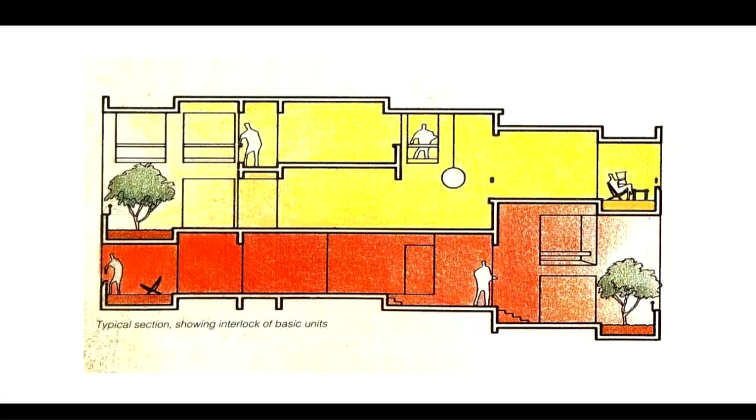I went down to Goa - this is my architectural tour in 2015 - and I found a few buildings down there of Mr. Correa's. What struck me about those buildings was there was a patience with the past and a striving towards the future. They were incredible buildings, and their heaviness was a surprise to me. I didn't expect such heaviness, but if you relate it back to the temples and the stepwells, you can understand it. There's a wonderful translation between the new and the old for me.

But I must say, what most took me on this simple trip was the stairs. This one set of stairs I remember to this day, and in fact I had to go through 500 to 600 images to find it. I looked at this set of stairs and thought to myself, the person who designed these was an architect. They weren't on a drawing as a set of stairs, they weren't a builder translating a set of stairs. They were deliberate and, for my money, really beautiful. They made me think a lot about access, but also where does beauty start and where does it finish?

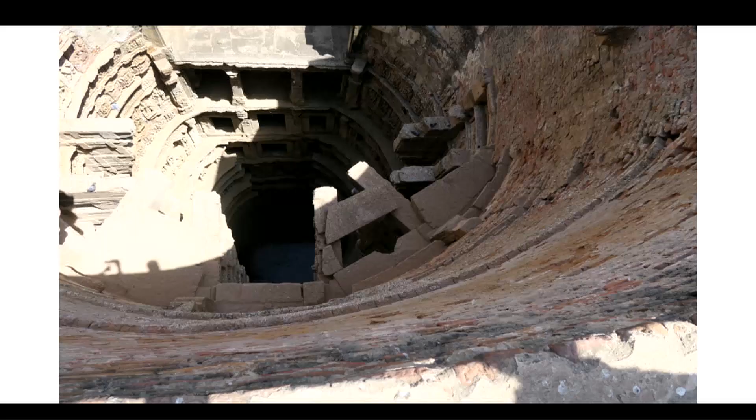I was asked the question earlier by a journalist, wondering how you, as an Indian group of architects, employ and integrate your past into the future, because your past is so rich, so intelligent, so symbolic, and so important.

So when I looked up Charles, when I was first approached to do this lecture, I found consistently over time these 4 values: integrated modern with tradition.

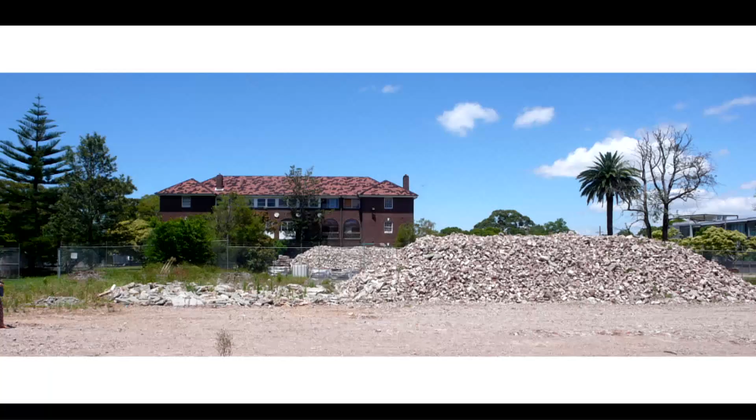Seven years ago we were asked to do, or rather it was a competition, a building here where the blue mark is—an old building in our terms, only 100 years old, so not really old, but in Australian terms it was. It was heritage listed, which confused me. I said, heritage listed, it's hardly a heritage building. But they said, we want to retain the arches.

The project was to change a nurse's quarter for an old hospital into a creative arts centre—almost the opposite in terms of usage. And the arches were protected by heritage order.

So what we did was put 7 arches through the old arches without touching them by 30 millimetres, then took out all the space underneath to create a two-storey space. Essentially we were trying to reinterpret some of the very rare Australian qualities of architecture—in this case, the veranda or the covered room.

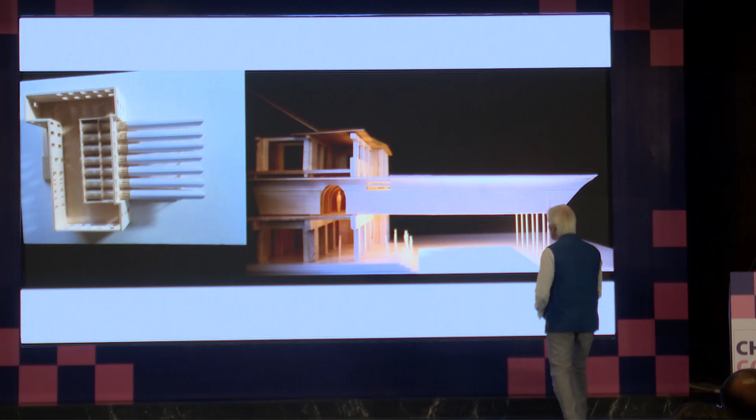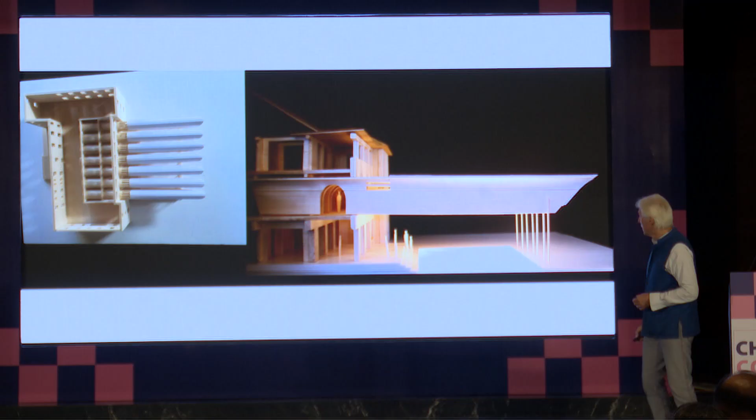My sales pitch to the jury was that this would become a highly activated external room for the community, and that worked. So these are the sort of drawings that we do—I still draw in pencil—and this was the outcome.

All we did was cut walls and put some brass edges on them; we didn't finish them at all. Then we drove these 7 arches through, and they became workspaces for creative people, like jewellery spaces and sculpture spaces. We then cut an equally beautiful form in the other direction to get a cross connection as well.

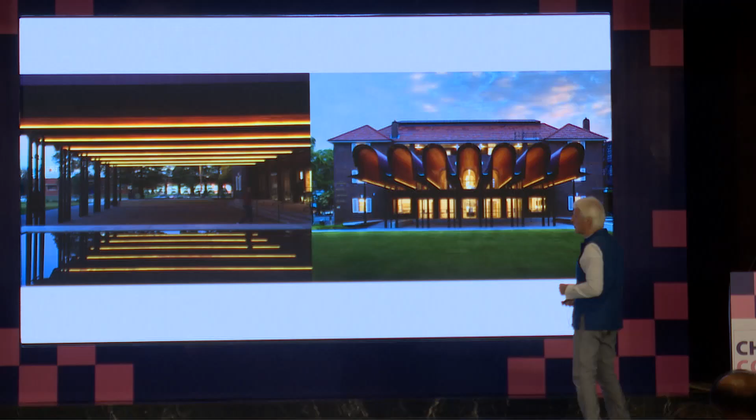So on the first 2 floors of a 3-storey building, we created like a room inside a shell. This later became quite a well-known building—I should have had a photo here of a fellow doing Tai Chi, because in our presentation we showed a fellow doing Tai Chi in the veranda, and the first day I went there, someone was actually doing Tai Chi.

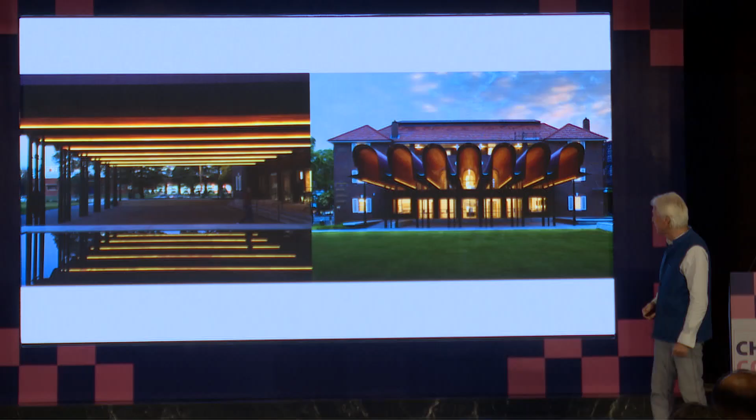This pond catches the water off the roof, and inside it, very shallow, is the carving of the original landscape of that place, so that as the water evaporates, the landscape reveals itself.

Sustainability and climate responsiveness: we did a building in 2007-2006, which was a wool shed. The wool shed is a traditional Australian building, actually, for shearing sheep, and it had never changed its design in 150 years.

What we did was redesign the wool shed so that it was basically a climatic response to how you might manage weather patterns and temperatures in an environment that is really demanding physically—probably one of the most demanding.

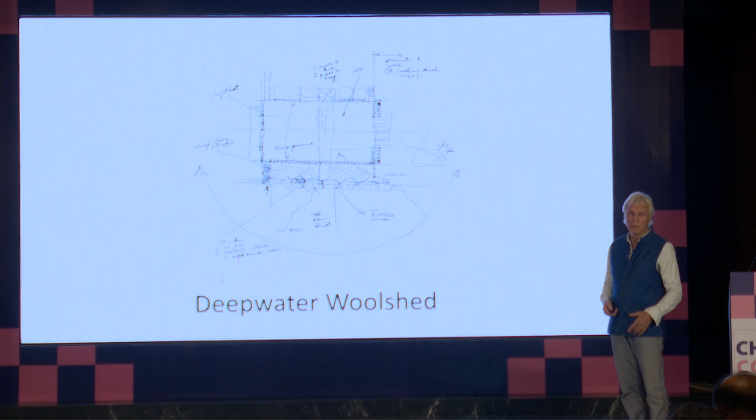These men, and women now, shear for 8 hours, hunched over like this, shearing about 800 sheep a day, so 200 sheep a session. A very well-known entrepreneur approached me and said he'd like to design a new shearing shed, a new philosophy in terms of shearing sheds.

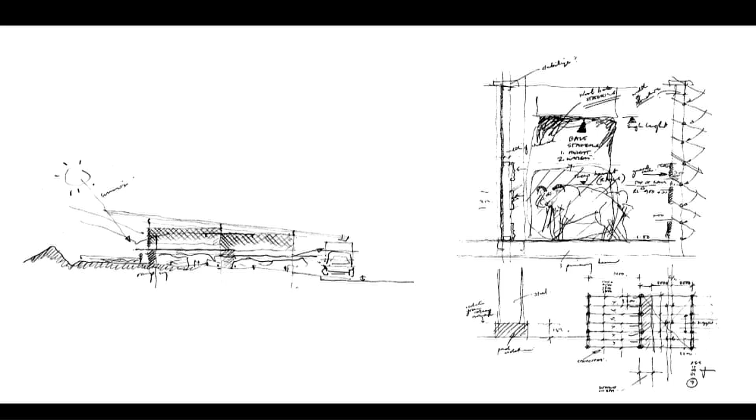So the building was designed very much based on sheep—heights of wool bales, accurate sizing for managing sheep. I'm from a sheep station originally, so it was quite appropriate to do this, and in fact my father was an engineer, so there were two things combined there.

We introduced this roof system, a whole new design that hadn't been done before, invented by a farmer. It's a deep corrugation that spans 20 metres and cantilevers 5. We had 9 sprinklers on the roof that we turned on at about 11 a.m. to cool the building down, then we took the cool air from the shaded ground, because when ground's in shade for more than 5 days, it cools down quite rapidly.

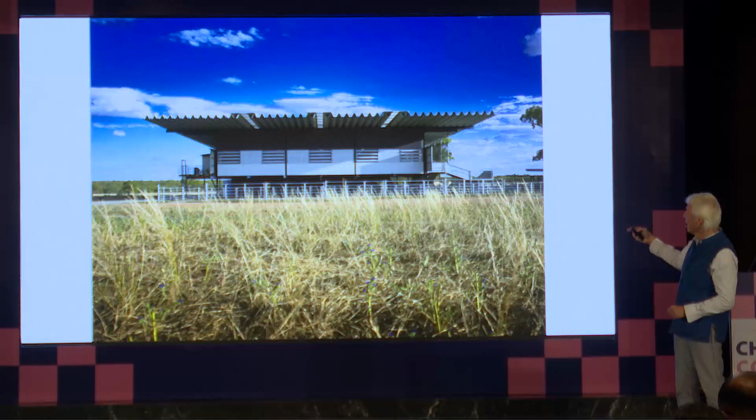We ran that cool air past the shearers. On this side of the building we had expanded mesh screens that we ran water down, since it was a non-humid environment, and the air came through those. With those 3 techniques, we reduced the temperature of the building by 12 degrees ambient.

All the walls were the height of the wool bales, and ventilation came in through these chicken coop panels. We had no complaints from our clients, which was good.

But what happened was we also put a lowered ceiling in just here, where the heat from the sheep came up, and we caught that heat. In winter, we blew it down on the shearers and heated the shearing platform by 5 to 8 degrees.

So that's on the other side where the shearers are, bringing it across. This extended section here is for the people sorting the wool. These are pivot vents here where we bring the cool air up across the shearers.

This shed has now become a benchmark for the design of shearing sheds in Australia. You can see the 2-way fans up here that pull the air up and also push it down in winter.

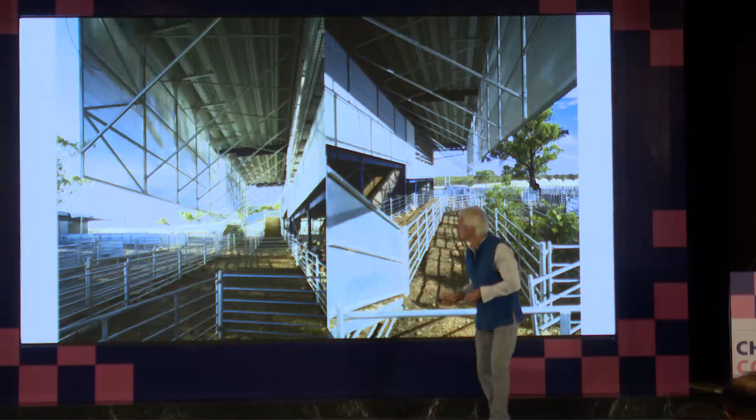This is where we run the water down these screens, and then the water runs onto this, which is salt bush that feeds the sheep. But as it runs onto the salt bush, it also catches the dust that comes off the yards. So there's a number of things being done here by this very simple building.

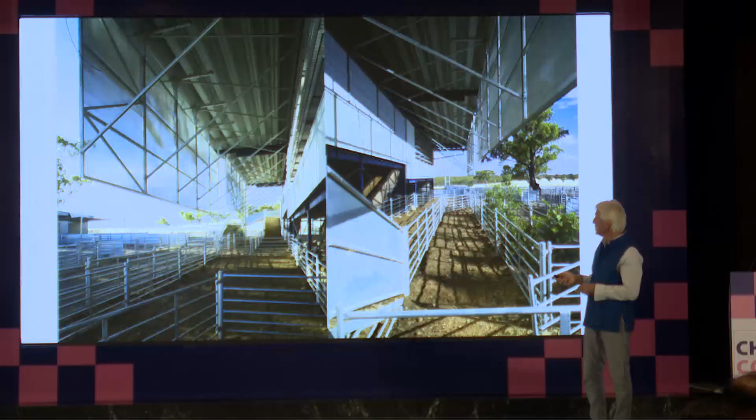By lifting it off the ground, we're able to hold 2,000 sheep under the shed in case it rained, because you can't shear the sheep in the rain. And we put the water tanks on the cold side of the building so they didn't heat up.

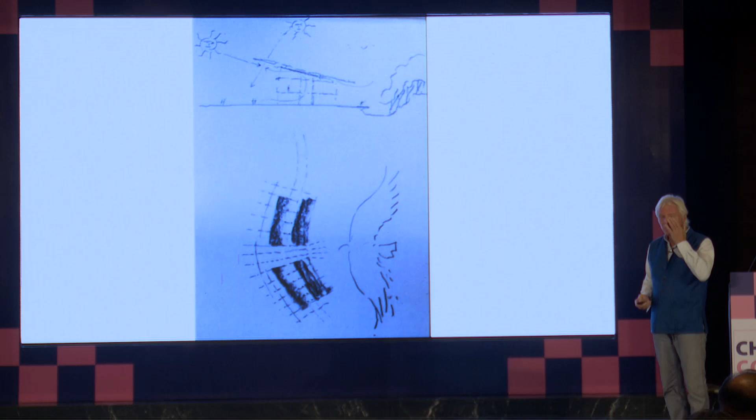The principle of the building was it was formed around a pond, and the pond had fish in it, and every teacher working in that building had a fishing line and could catch their lunch. It had a fly roof, which was a natural ventilating system, and it had a series of light shafts.

Now, the human-centric design here was there were 3 elders, Aboriginal elders, that managed the building process. We met with them every week and went through the design with them, and what became apparent was how important humans were to them—much more important than the building.

Every response to them was, well, we'd like to come in that way. We'd like to have multiple entries so there's no prioritised entry. We'd like the building to be a house, not an educational centre. We'd like people to have equality onto the pond. We'd like every person to have access to the outside and access to air, fresh air and sun. It was a really interesting process, and that was 22 years ago.

This is my teacher, Richard, and this is one of my students, Sue, and the 3 of us designed the building. So it's 3 generations of architect, which was really interesting.

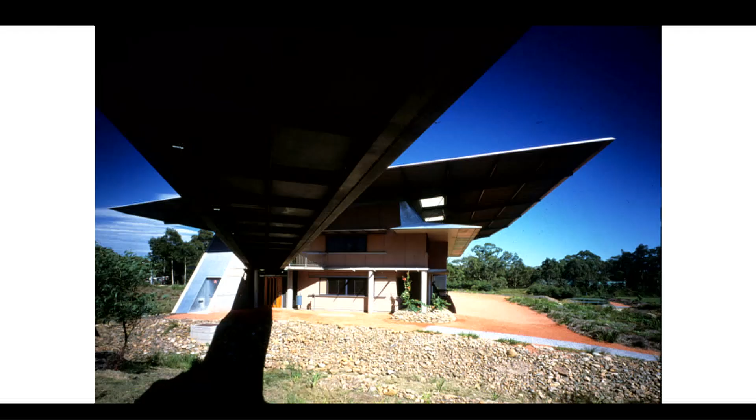This is one of the pathways they insisted be into the building. It's the pathway from an old swamp where there was Aboriginal settlement, and then there was access in both ends, both sides and the end as well. I think there were 6 entries to this building, none of them prioritised.

The central room had a huge door on it, 8 by 8, and inside that central room was a fire that you could put on. You actually had logs for the fire, so fire was very much part of the building design, and there was a kitchen, and a place for elders to meet.

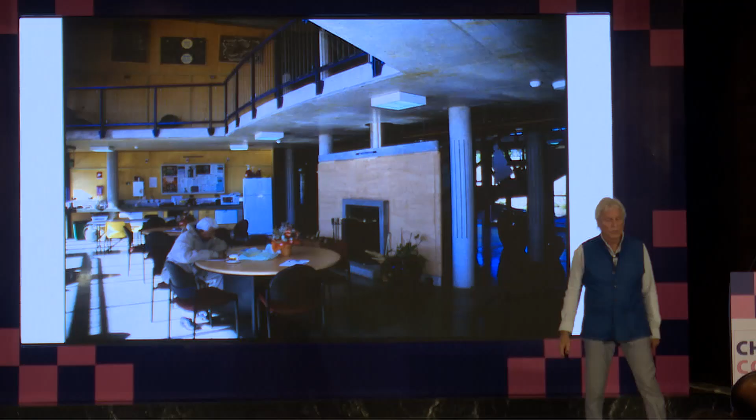So the inside of this room had a kitchen that went to the outside. It had a fireplace. It was a home. It was a house. And just as you have an opera house, you can also have an educational house.

The outside kitchen, light shelves to bounce the light from the skylight into the rooms, and classrooms that had access to the outside. So the awareness this brought upon us, even more than what we already acknowledged, was how important this connection is for education. It's not a distraction, it's actually a fundamental connection with nature that assists in one's balance.

Corridors—these were grates in the floor where we took the cool air from downstairs and evacuated it through vents up the top in summer, and then closed those vents in winter and heated the building. We incorporated artists into the building, which was a competition.

We had artefacts in the downstairs rammed earth wall. The earth was a local earth. And this is where the teachers would come at lunchtime and fish for yabbies and throw them on the fire, which is an interesting concept—that a building, an educational building, a university building, can be educational in terms of life as well. You can go out and catch your food. That was introduced by the people, not by us.

The central room, open. And then affordable housing—the four things. Five years ago we started a company called Dimensions X, which builds these modular homes.

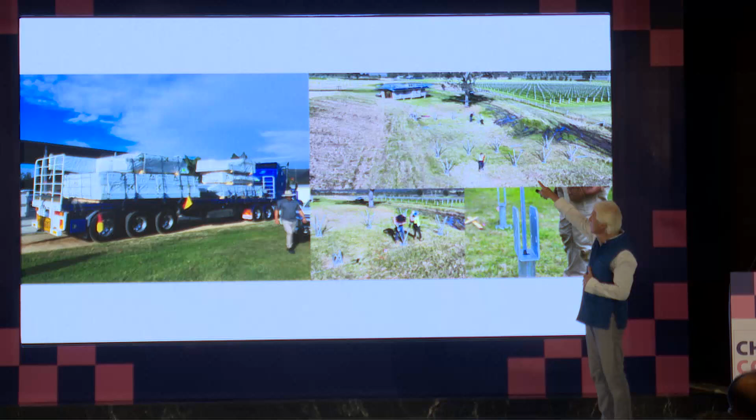We spent the first two years doing design research, and then we ended up doing CLT homes that arrive on the back of a truck.

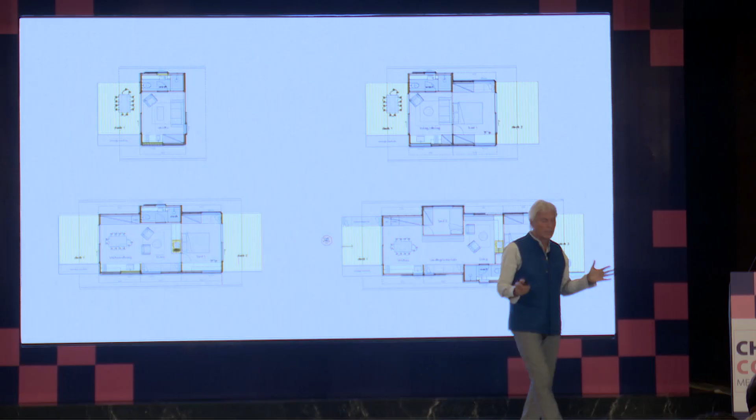This CLT model, the three-bay model, has 729 combinations. Someone can get onto a website and design their own house with 729 combinations, because the side walls have three different positions—so there's nine possibilities per bay.

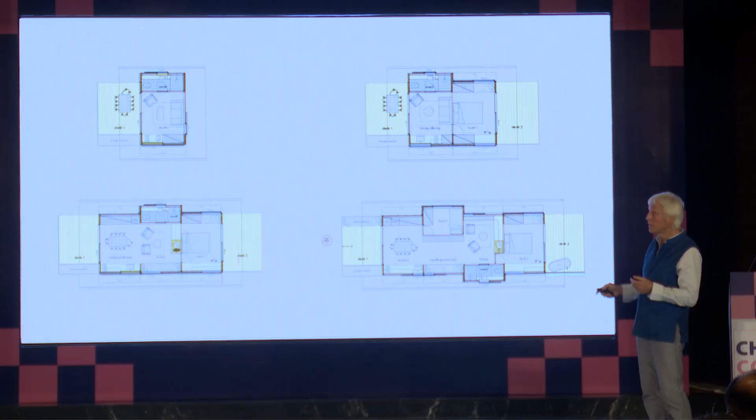They're erected in a day and a half, and then fitted out with joinery that's pre-made in a workshop we have an interest in. That joinery gets delivered and installed in the building in another three days. So the entire building, about 62 square metres, can be up and running in under two weeks.

At the same time, it was the end of COVID, and this was a student in the office, Emily Winter, and we decided we should do cheap housing for students that they could also use as a studio.

So we got a trailer that you can buy from any steelworks fabrication plant, and we put a back on the trailer. Emily did these drawings—well, it's a series of drawings. And we built this little thing we call the mobile studio, which is this building here.

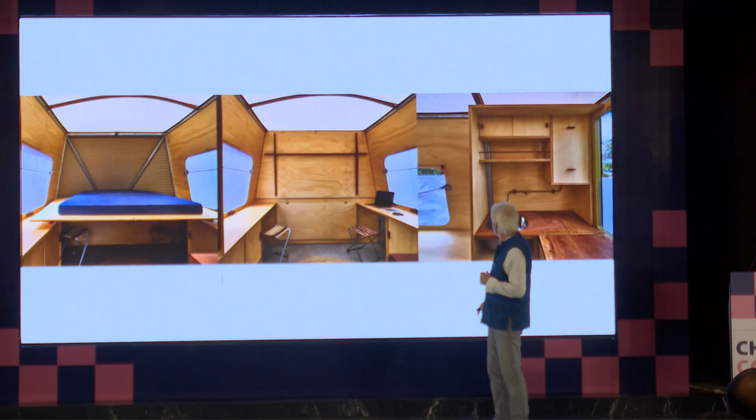It has a section here which folds down and becomes a bed, or you push the bed up and it becomes a desk for two people, and it has a little kitchen on this side of the trailer.

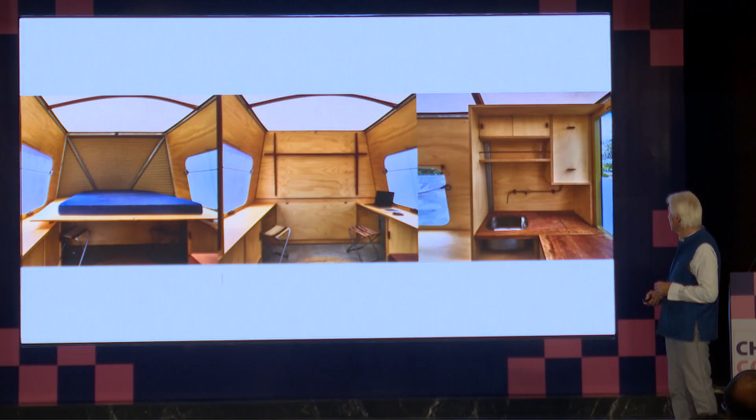It's a lot of money in India, but for $18,000 a student, or two students, can have a little studio they can park in their parents' backyard, on a beach, or in a caravan park. It's got a canvas roof, so the light comes in—it's a beautiful light. We've had, I think to date, 800 registrations for these.

That's the combination of the two buildings. What people can do, if they want to expand this house—and it really is working off the back of indigenous thinking, housing as mobile—is, if you want to expand the house, you can buy another one of these and have another bedroom study that you can put anywhere on your piece of land. You don't have to extend your house.

So, from what I can work out, the primary parameters of Mr. Correa were place, climate and tradition.

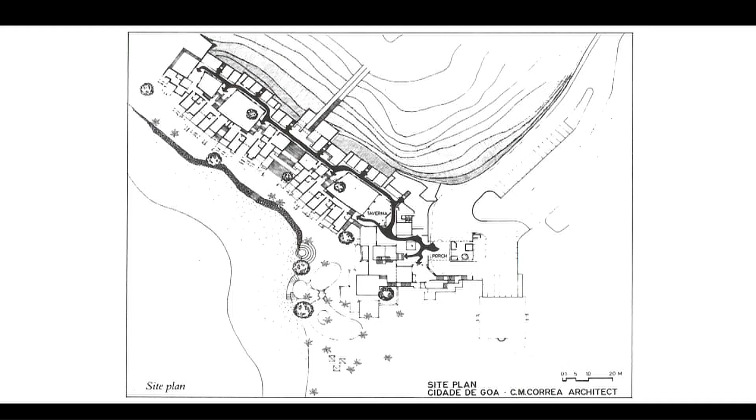This is a building I found down in Goa which intrigued me enormously, not just because it looked different, but because of how it was sited. It was sited incredibly cleverly up against this hillside, and even though it was a modern building, it had this quality of dense Indian occupation about it—certainly not like this, but with that nature.

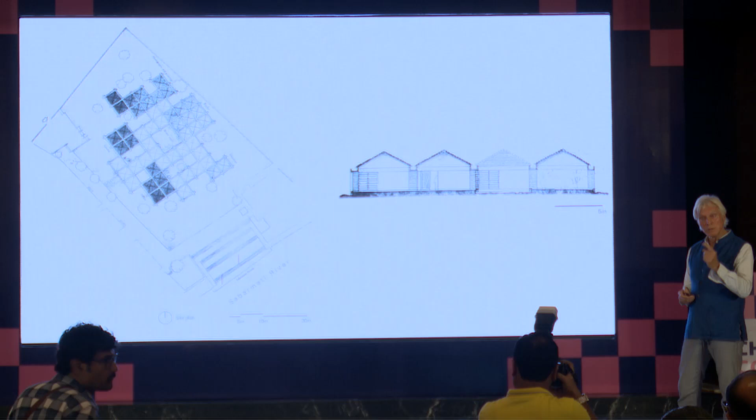And on such a dignified grid, something that changes over time and developed over time, if you look at the housing as the last example.

So what's our philosophy, and how does our philosophy overlap the Correa philosophy? I think our philosophy is definitely, how do we best preserve nature? I think that's a really important part of our future. And I was just at the Eco Park Dome this afternoon, where I read that 80% of cleared land has pesticides on it.

Interesting. In Australia, we always start our talks or our conferences with an acknowledgement to the people of the country that we're speaking on. So rather than do that, I'll make a note of that.

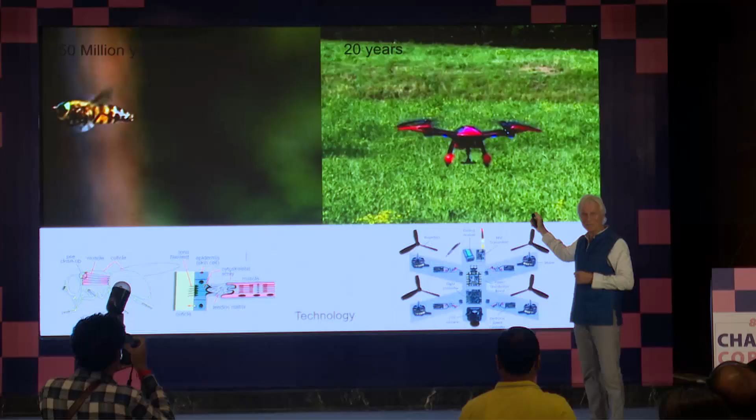Now, the guys over here told me this would work, but it's not. This one here also flies, but maybe it shouldn't. Oh, there we go.

So this honeybee has been around for 150 million years. And this drone has been around for 20 years. I mean, it's been done before. And in fact, it's been done a lot better. And we don't pay attention to that.

I wonder, because I muster these sheep all the time, and I see sheep, I wonder if we're not a little like sheep. We don't think enough about what we're doing and how we're doing it. We're a bit follow the leader-ish.

I'm just going to show you some projects through the country. We're doing 2 projects over here. Kunawarritji is probably one of the most remote communities in the world. It's 15 hours drive east of Port Hedland. And it's only 150 people. At ceremony time, it might swell to 500.

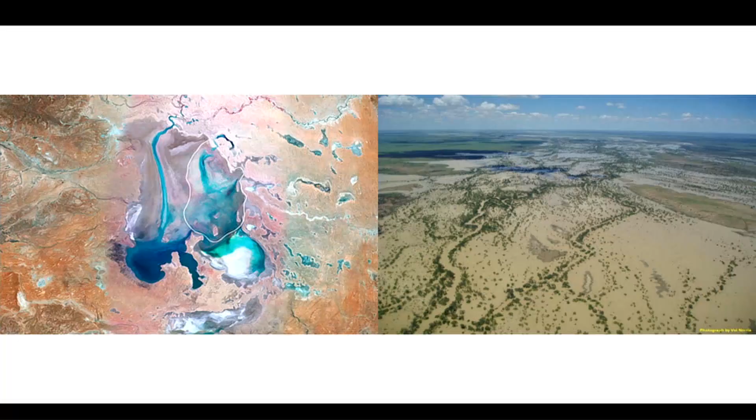Our country is about 24% desert, incredibly flat, oldest continent in the world. Most of the water of Australia, most of this water in the centre of Australia flows to that one lake, which is Lake Eyre, which is the most pristine salt lake in the world. And then it disappears. It doesn't really disappear. It goes to the Great Artesian Basin, which is the biggest artesian basin in the world, which has 64,000 cubic kilometres of water in it.

And that's why trees grow in the desert. And at the moment, in fact, 2 months ago, this is the Cooper Creek, which services the Lake Eyre, floods to about 60 kilometres wide when it's flooding, and the whole country changes.

We inherited, and I think to a degree India did as well, but they fought it off, sort of an English way of looking at our country. Winter, summer, autumn, spring. But in fact, there was a very strong Aboriginal notion of the seasons that we had no understanding of whatsoever, which were far more appropriate.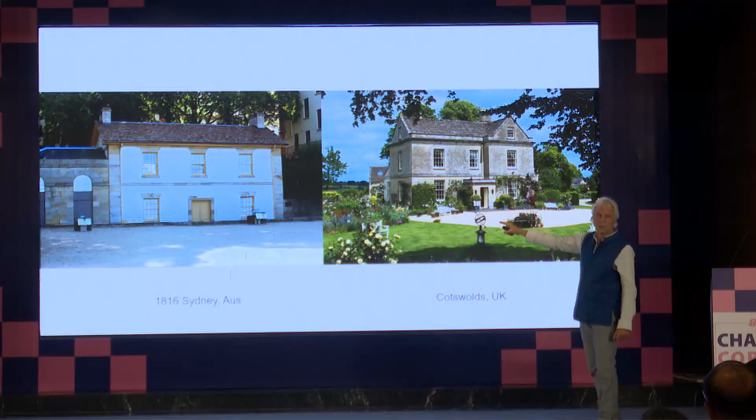This is in the Cotswolds in the UK, and this is the first building in Sydney. We inherited a building type in Australia that was completely inappropriate to the country, to the landscape and to the climate. These are our new building types.

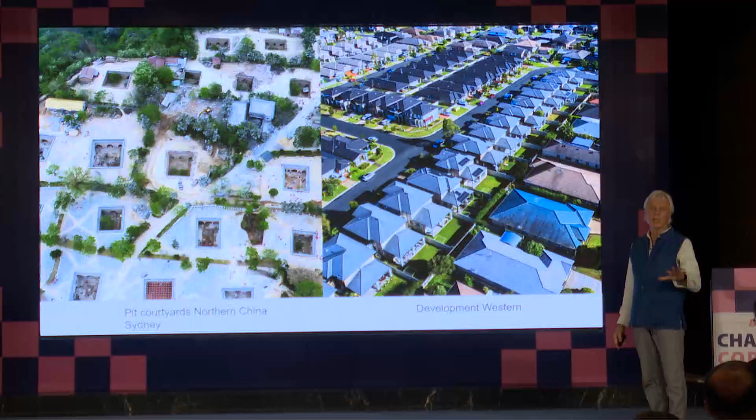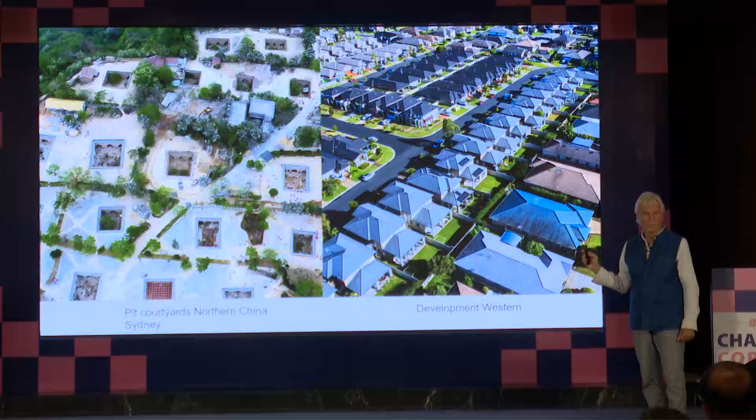These buildings, which are subterranean courtyard houses in northern China, are built for climate management and social interaction, and they're highly successful in terms of stable communities. I reckon in Australia, people would buy and sell houses at least 3 times in their lifetime, so there's no continuity to the community.

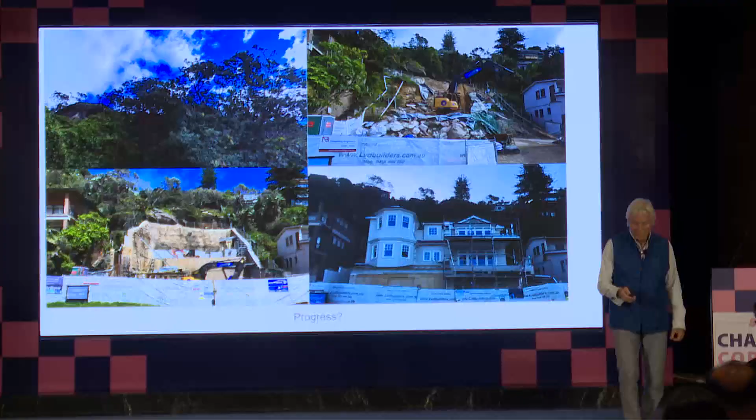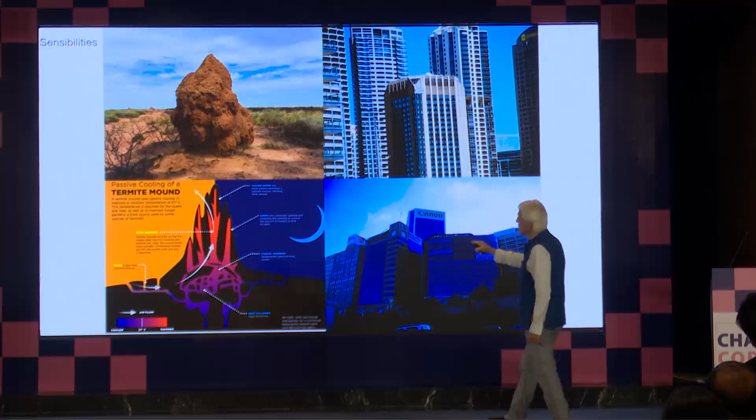I wonder about our direction. And this is an interesting image, particularly for, I think, Indian development. A termite mound in Central Australia has means and ways of adjusting the temperature inside the mound to 21 degrees constant Celsius, 24/7. The termites move holes around inside, and there's 1 million termites in the mound.

These buildings we build in cities - it would be very easy to design them so all the heat went up, could be caught at the top of the building, we could have heat pumps there, and we could change that energy to cold energy through the heat pump and cool the whole building. But instead, we get air conditioners that use 40% of the city's energy to cool the building and cost a fortune.

How much do you need to do to make a beautiful place? How much waste do we produce on just building a building? We can build a small house out of the waste from building a big house. And this is a whole issue of design, I think, and design today.

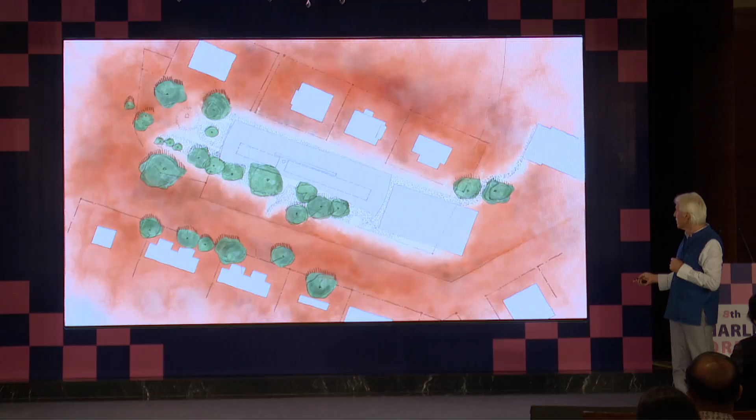It's a separated roof, and then it's a series of rammed earth rooms underneath that are good for the heat out there in the desert, but they're also good for the cool as well. And it sits right in the middle of the community.

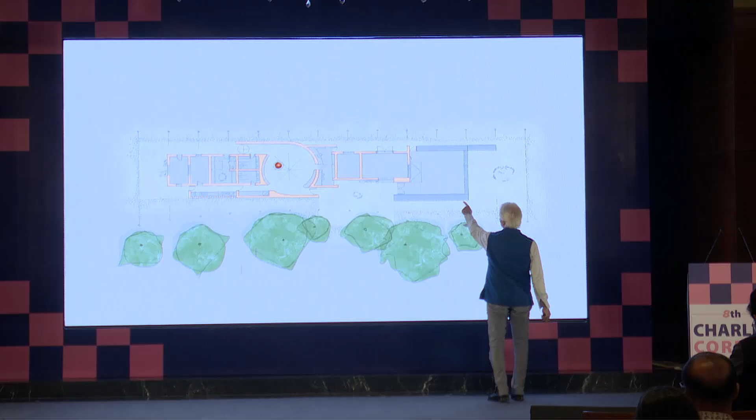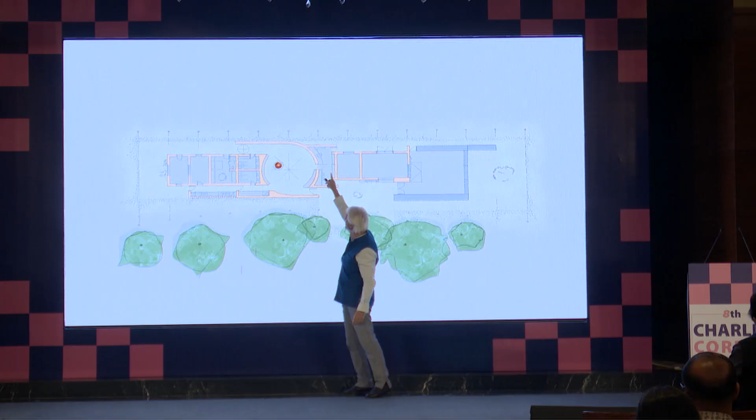Very simple planning. This is an adjustable school classroom. This is a fold-down stage because they have a band that wants to practice here. This is storage and services. This is where the school headmistress sits, and this is the community room around a fire. And then there's the bathroom and the laundry.

It's very much part of the community, which are the only trees on the site. And then you've got the elders' room at the end there - so the elders are on the private end of the building.

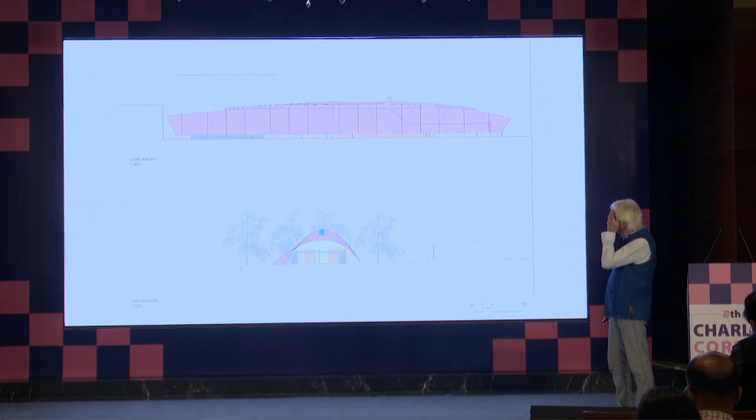The building is about 45 metres long and has a central dome over that circular room, you can see it dotted there. In order to proceed with the project, the elders insisted that they sign the drawings, so these are all the signatures of the elders who approved the presentation and the drawings.

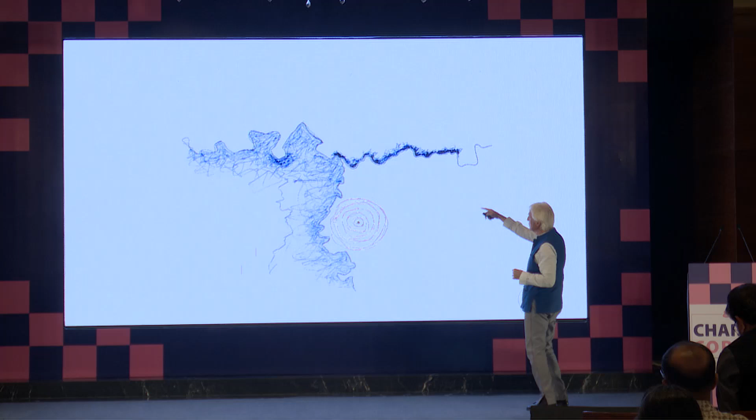Moving closer to Sydney, across the continent, we're currently doing a tourist centre for the Wiradjuri people, the second biggest Indigenous nation in Australia. It's on the fork of two rivers, where they meet. When I asked the traditional owners what was significant about that place, they said it's not significant, but we want to make it significant.

Local to this place were scar trees, which indicate ceremony, and the scar trees were all carrying circular symbols. The advantage of a circle is that it's non-directional, so it holds things. So we thought about this, and it's very much about the rivers, and the rivers on this side of the continent also flow west, which is very interesting.

This is the town it's in, a very strange town. The idea was to build a series of circular rooms and put a big shade roof over the top, using the negative spaces as courtyards. But that proved way too expensive, so we ended up with just one circle.

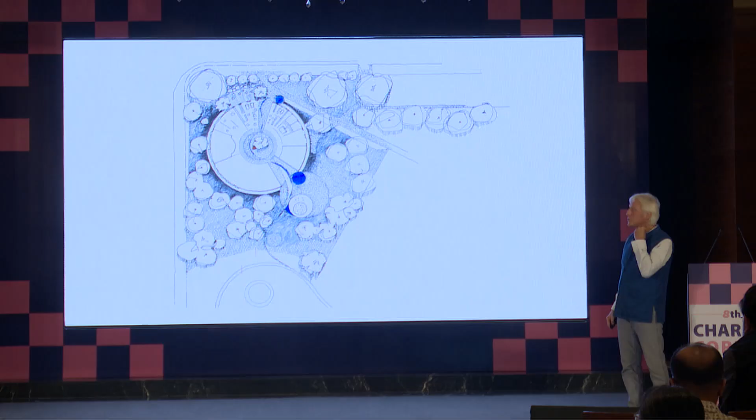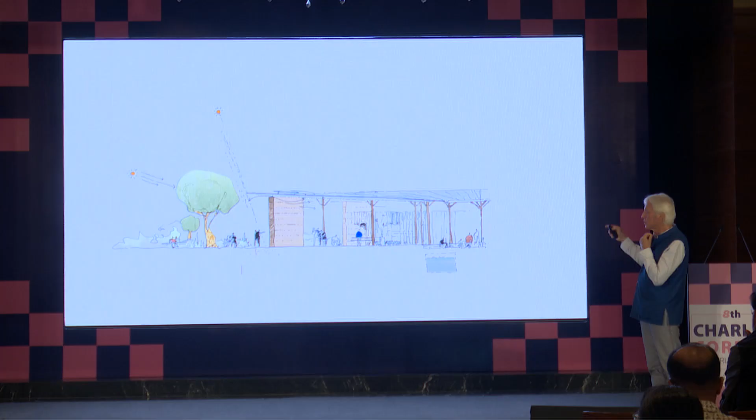This is a typical presentation drawing of mine. The building has a very simple roof, and the water flows to the centre, which you see when it rains—it runs into the courtyard. The courtyard can see the sky and the moon. The walls are rammed earth so it can manage the heat, since it gets very hot there in summer. This is a holding place for artefacts and sacred objects, separate to the building.

The building also has a series of ponds around it that flow when it's raining and dry up when it's not. This building is out to tender at the moment, and we're hoping it comes in under budget.

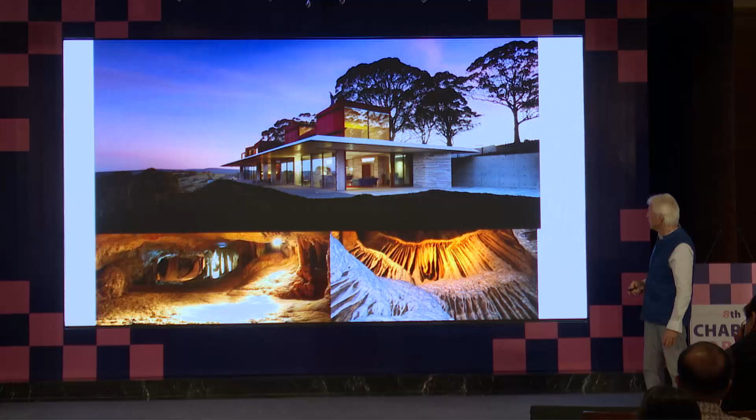Closer to Sydney, in the Blue Mountains—which is hardly a mountain range, only 1,500 metres high—this is the Three Sisters. We did a house there called Invisible House. Local to Invisible House are the Jenolan Caves, and there's a real character to the limestone country there, which we wanted to understand with our building.

Probably the most important thing about this building is we wanted to pick up on the contour that runs all the way around this Megalong Valley, which goes for about 20 kilometres, so the building sits on that escarpment contour and feels like it's its front garden. These light and ventilation boxes also relate to the mountains in the distance, bringing light and changing the space inside the building. There's a lot more to explain, but in essence, that's where it came from.

There's a corridor across the back, and you enter this building going through the earth because there are a lot of wombats there. The back line of the building is curved so it doesn't hit the land hard, but also changes the light inside the corridor. Inside, we used a local sandstone. It's pretty tough—it gets snowed on, but also gets 45 to 50 degree heat days.

Closer to Sydney, we've just won a project that's out to tender. Well, prices have come in and we're currently modifying it, but it's a very large university building, an Indigenous centre of excellence—the first one in Australia—basically a university building for Indigenous people.

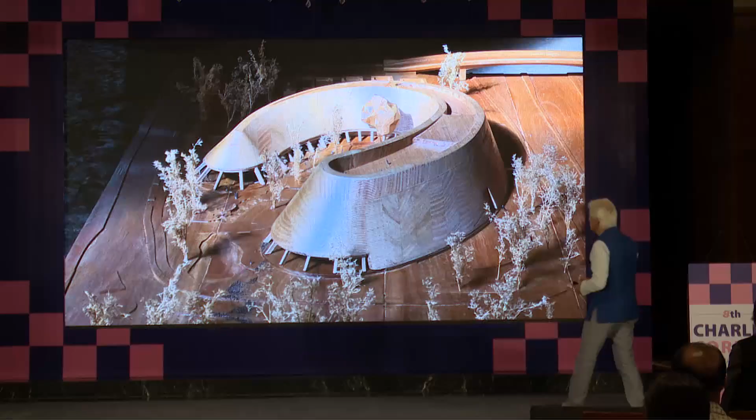This was the concept drawing presented to the university along with other drawings, and this is the building itself. The mangrove swamp is over here, so the building accepts the energy of the swamp into its courtyard, and it puts its back to the highway, which is on the other side.

Interesting on this building, which is a technical fact, is it has a facade that is modelled by environmental modelling. It has perforations that change all around the facade depending on orientation, what sun and light you want in. So the character inside, which you'll see in a sec, is purely managed by the functional screen on the outside.

Radial planning, which is very tough and takes a lot of time. And if you want to make money, you don't do radial planning.

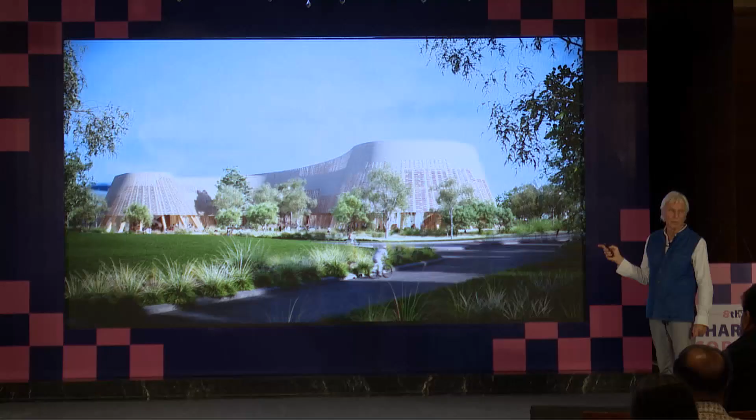Then the central courtyard, you can see the modelled tiles on the outside that manage the light and sun load. And then the corridors that run around that courtyard, so from the corridors you can walk into and out of the courtyard. So the courtyard is like a big teaching room, not dissimilar to that first Aboriginal cultural building I showed. But it's all out of CLT, cross-laminated timber, so it's actually carbon neutral footprint, even though it's 4,500 square metres.

Then the work in Brazil, we started in 2016 and stopped when COVID hit, and then diverted that foundation work to the Aboriginal stuff I've just shown you. But the work in Brazil was done with communities around Salvador. My partner's sister has been working as a health worker with them for 18 years, so we get immediate access into favelas, which is very, very difficult to get.

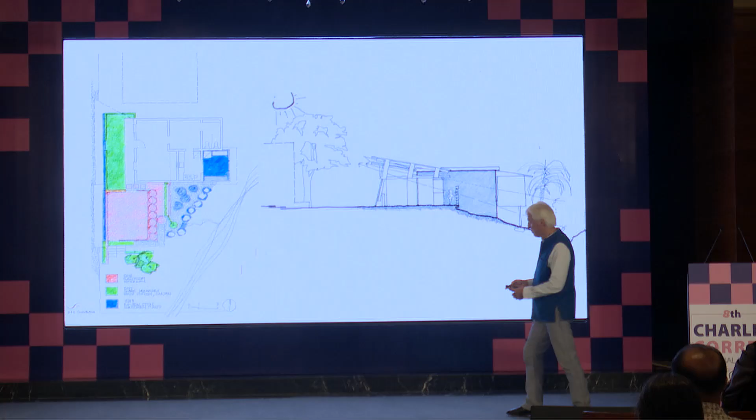But what happened in Brazil was the Portuguese brought the nature of a Portuguese building to Brazil, which is completely inappropriate for the type of climate in Brazil. We arrive in these favelas, which are incredibly dangerous places unless you're there to help. We spend a day working with the people - they usually have a project when we get there, and by the end of the day we've come up with some proposal or beginnings of a proposal.

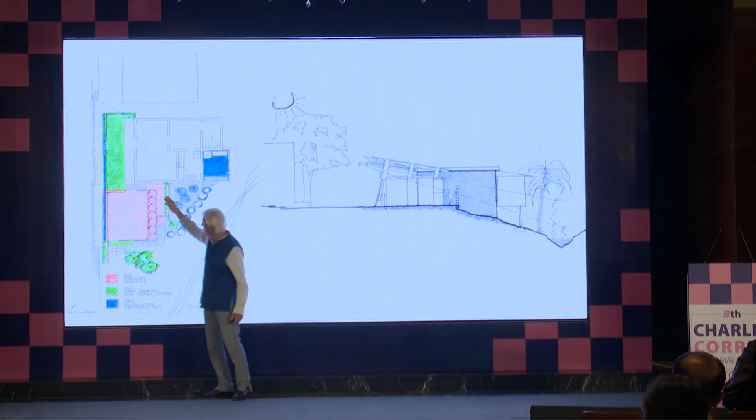These are 3 projects we did. This was the Portuguese building, which was roaring hot in summer, and it was a kindergarten. We put a veranda on the front that shaded the building to the west. We built a kindergarten room just here, and we used culverts from the side of the road and used them as water tanks to cool the room, so they had evaporative cooling on them. And then we built a kitchen out the back and opened up the kitchen to the building to get cross ventilation and reduce temperatures by 8 degrees Celsius inside the building.

And then we used a creek down here that the building had its back to, and we brought the cool air from the creek through the kitchen, through the building, to the other side and ventilated the building as well. But these workshops were about a 10-day workshop, and we did 3 of them on this building.

So it's pretty rudimentary. One of the things we always do when we do a project is we improve the quality of the water for the kids. So we filter water and collect water for the community, which they're not used to doing - they're not used to having water tanks. We are, because we have no water in Australia. But in Brazil, they always had water, but now it's polluted, so there's no technology of catching and using water. So we built sunscreens, we built a kitchen out the back, all with recycled materials except for the fibre cement.

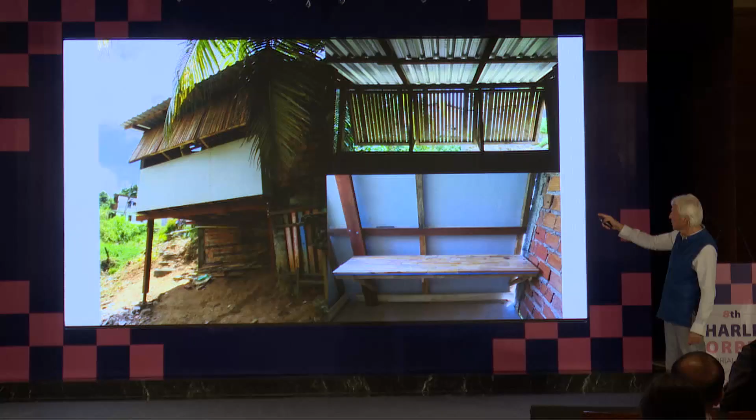And the students, usually university students, are integrated in a favela, the most dangerous of communities, for 10 days, and looked after. It's quite remarkable.

And then we got another project on an island, and ironically it was the slaves of the Portuguese who had escaped by swimming across this sea body, and they settled the other side of the island so no one could see them. It started with 6 people - there's now 1,500 people on the island, all with African heritage.

And we went over there and we built this storytelling room, but the first thing we did was put water tanks on it, and now the whole community uses the fresh water from this building. And in fact, what happened was the local council came over and saw what we'd done and took that back for their own educational purposes.

On this trip, we took art therapists, we took physiotherapists, we took dentists, we took plumbers, we took builders, we took joiners, we took architects from Brazil who wanted to volunteer, and it became an incredible offering to a community.

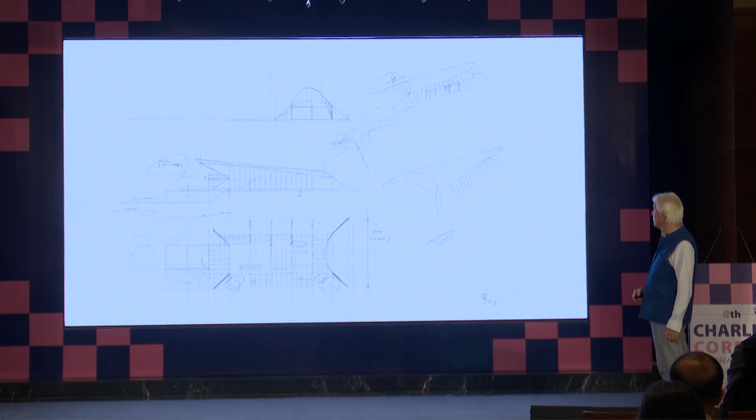The roof is asymmetric because this is the northern side, but it's also the side facing the nature reserve, so we let the winter sun come in. We closed the fabric, the drape, down to the south where the weather comes from. Then we put little service rooms in those triangles of the buttresses, which go down to the rock.

It has a relationship with the ocean, but you wouldn't understand that, or know that there was suburbia either side of you. It has its own particular nuances in terms of how you might build on a sand dune.

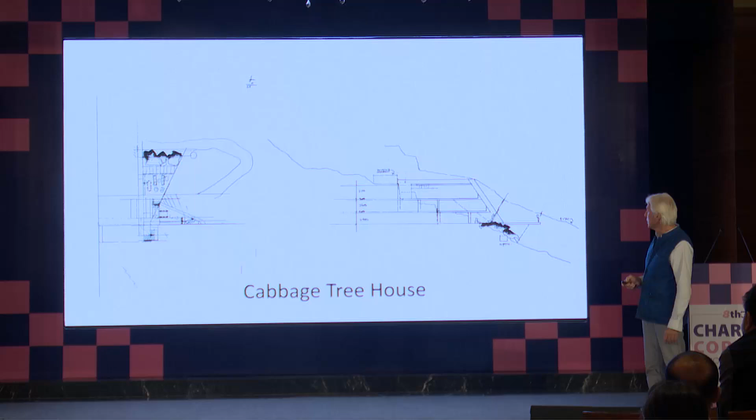This is a building on the side of a hill-cliff that was a series of rock shelves, which you approach from above, so I wanted the roof to be as artistic as the building, not to simply descend upon a roof. So we lock this building into the rock shelves and open it with the contour horizontally rather than vertically. The vertical facade is where you get your winter sun, and the horizontal facade is where you get access.

So it sits, and the top room is the most civilised room. These facades all open. The middle room is more like a suspended bedroom, a private area. Then the bottom room, you can see there's a bath there, is the cave room. And the lowest room down here is the creek. We take the cool air from the creek up this corridor, which is the stairwell, in the bottom here, and we cool the whole house from the creek.

So the natural patterns of that site are both the heating and cooling, because that angle of the wall is the angle of the winter sun.

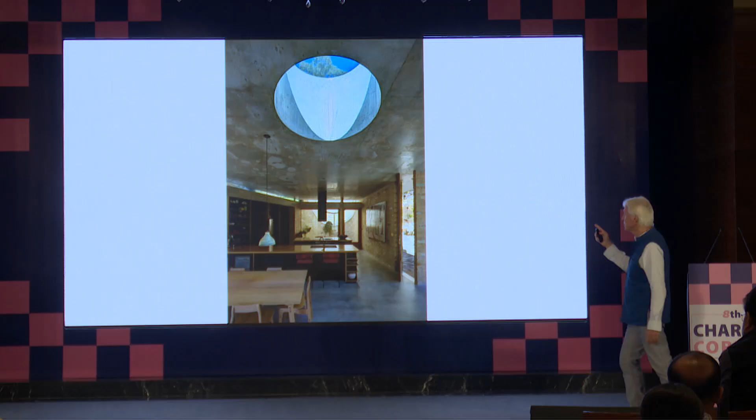This one skylight was put in during construction because I was worried that the winter sun wasn't penetrating the back of the house. It was an elderly couple, and I wanted that sort of pool of sunlight to be present. But also, at the back there's a curved courtyard that also catches the sun and reflects it into the house.

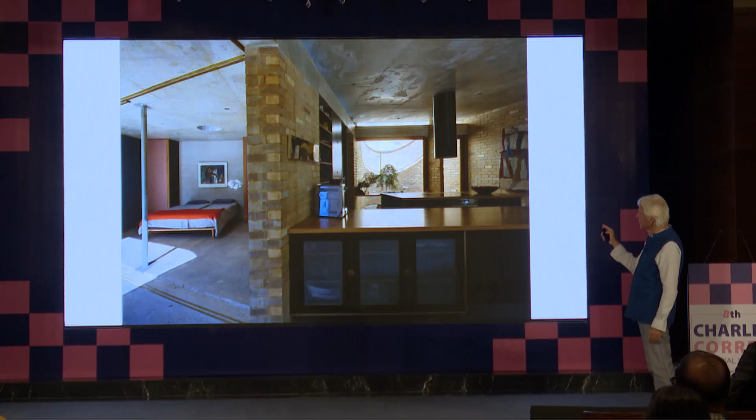All recycled bricks. So I guess the houses are still trying to be campsites. They are houses, but they have a campsite nature.

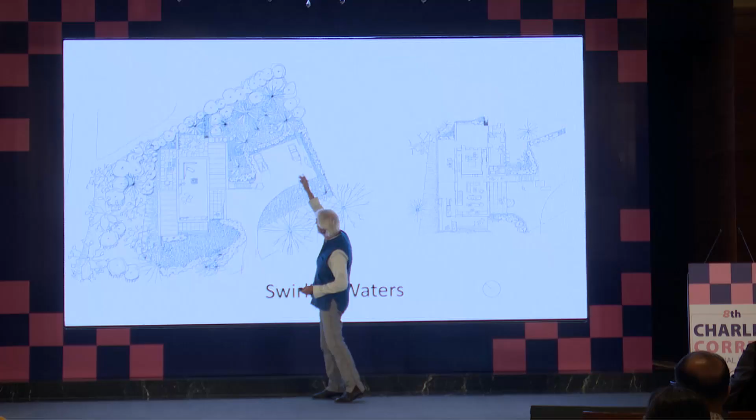Then this is a house we've just finished. It's on a beach. There's a rock escarpment that goes around like this. So the house is actually, this is a rock room, this rectangle.

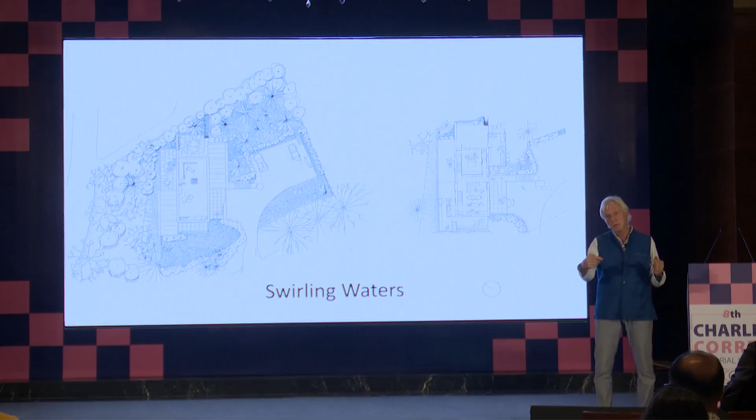It's made out of 2 metre by 500 by 500 blocks of sandstone. And then these are two very tailored timber veranda rooms that sit on either corner of the rock room, which allow the building to read on the diagonal as opposed to reading as an orthogonal building in a landscape.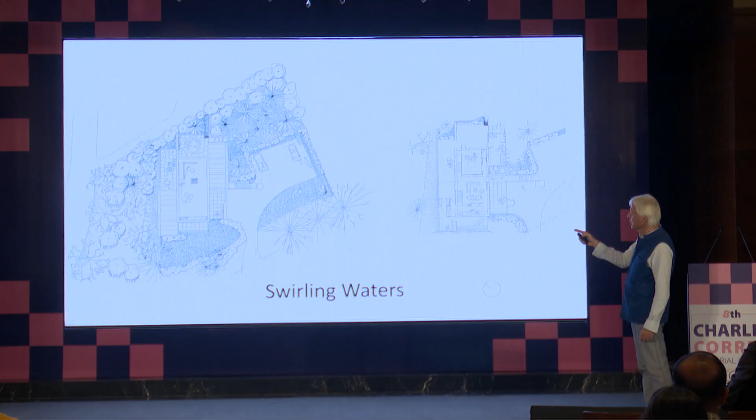So these, again, are presentation drawings, hand presentation drawings. And then this is from behind.

So this is the stone room, which is a big room, 14 metres by 7 metres by 8 metres wide. Then this is a veranda room, and then there's this diagonal one over there. This is all off the grid, this building.

You saw that house in the Blue Mountains, the invisible house, the one with the big roof. That guy on the left-hand side was the builder of that, and he was 34 when he built that building, on a completely isolated site. He walked off the job twice, and I had to convince him to come back.

And then Fernanda Cabral, who is my partner, but also works on the Brazil projects. And then Stewie, who is his off-sider. Basically, those two blokes built this house.

The only subcontractors we had were electrical and hydraulic. They did all the stonework, they did the timber work, they did the doors. They did all the steel work, they did all the concrete work. They're like traditional builders, and this is the fourth house we built with them. This is Mark welding, brazing brass on site to make a window.

That's the main room with the rough stone, so you can feel the stone, the character of the stone, in contrast with the beautiful timber rooms on the diagonal. This is looking from one of the timber rooms, which is not butted up against the stone wall, onto a walkway that overlooks that space. And this is a box, which is a bedroom box within the big space.

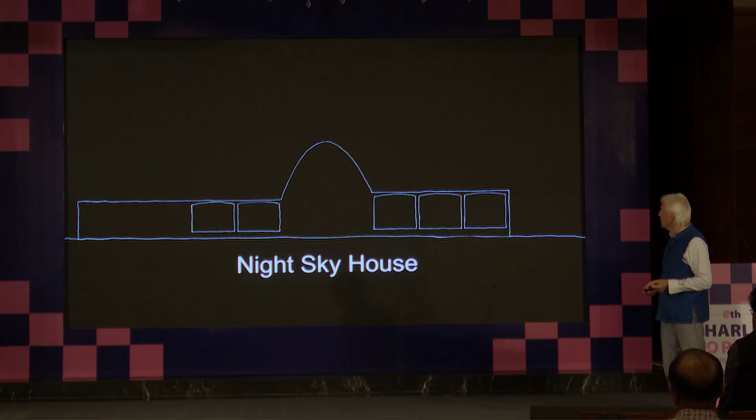The last building I'd like to show you is called Night Sky House, done for a wonderful man who has since passed away. He was disabled when he commissioned the house, and his favourite shape was a parabola. He had two masters and one degree - he was an astronomer, an architect, and a physicist. He commissioned this house in the Blue Mountains, similar to that invisible house but about 20 kilometres away, on this escarpment. He wanted to look at the Milky Way.

I did a trip from Broome, where that other community is, all the way to Sydney last year with four architects from around the world. I phoned one of them and said, 'What do you miss, Neil?' He said, 'I miss the Milky Way.' Interesting - the sky has lessened in our awareness than it should.

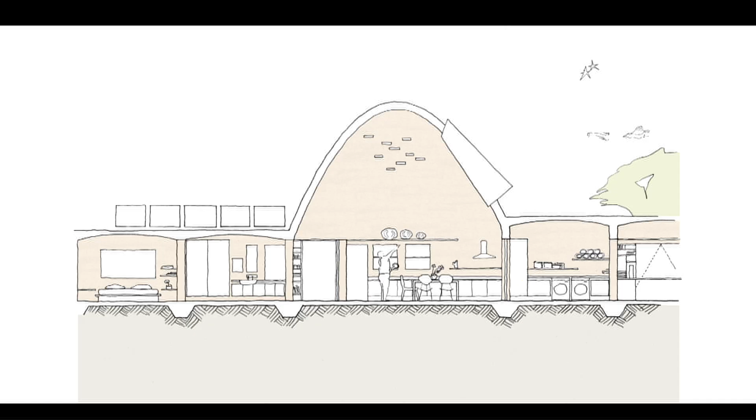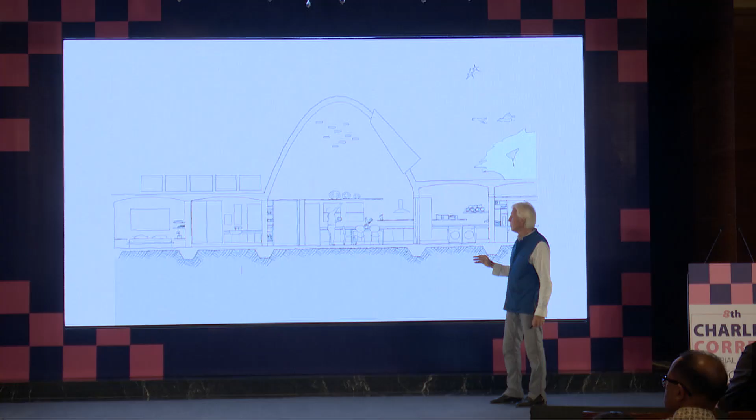And these are some of the early sketches. This is a section through the building, so it's a very simple section. It's the parabola, it's the central room, all in brick, trying to be as archaic and ancient as possible. It's the social side of the building, slightly higher in scale than the private side. It's a building for a single man in a wheelchair, so it's a very simple building - and maybe that was its advantage, that it had to be very accessible.

It was completely off the grid. We had 60,000 litres of water storage. We had enough solar to put it back on the grid and run the house. We had self-treating sanitation, and we had a connection with the night sky.

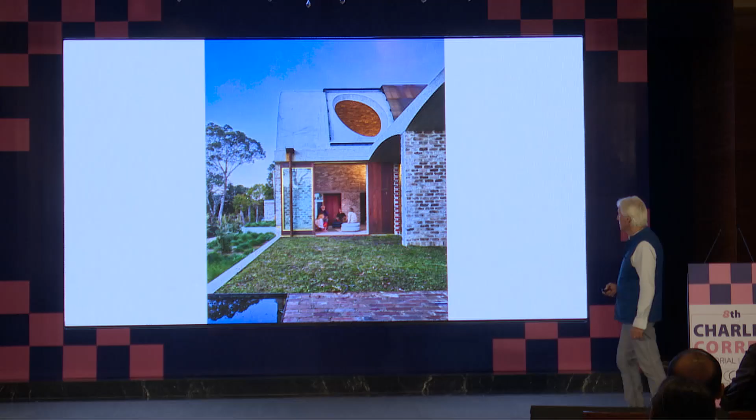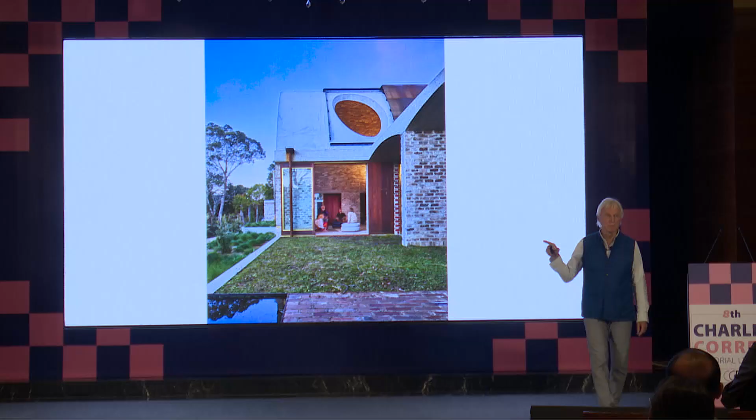So this is the client with the beard. There's a lot to explain about this building, but in essence it's a simple work of art. This is the private side. The red bricks are actually the same - these are all recycled bricks. The recycled bricks are glazed so we didn't have to use flashings or damp-proof courses, we could just use a glazed brick. We also used the glazed bricks in the bathrooms, so it's the same brick except glazed. And then you can see some glass bricks up here.

So they bring in the light on the equinox, bringing it in horizontal into the building. This water body here, at a certain time of year, reflects light up into his studio where he made amateur rockets - he was the amateur rocket height champion in Australia. That big door slides outside the studio, so the studio opens onto its terrace in a very controlled way in terms of scale.

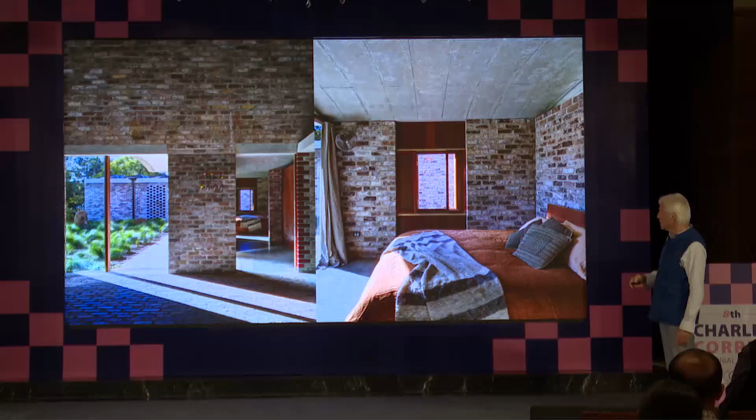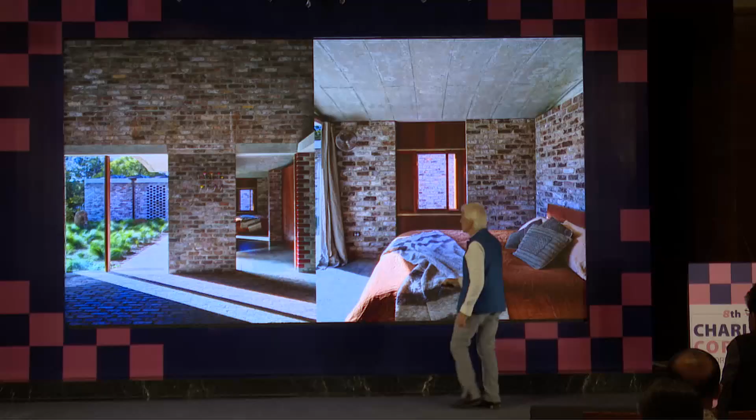His bedroom is in the distance, and this is like a long corridor where the rooms offset themselves so the building feels like it changes, but the corridor is straight. Doors are recessed into these double brick walls. The doors have a little panel in them, and they're actually two doors, a small door and a big door, so he could operate them easily - he didn't have to pull a big door across. The small panel of glass is where they meet.

And this is the constellation in the night sky that he looks at. There's one of the doors in the recesses. We made all the basins - or Mark made the basins. Mark made this house as well, and we designed and made the door handles to suit his hand, because his hand was quite crippled.

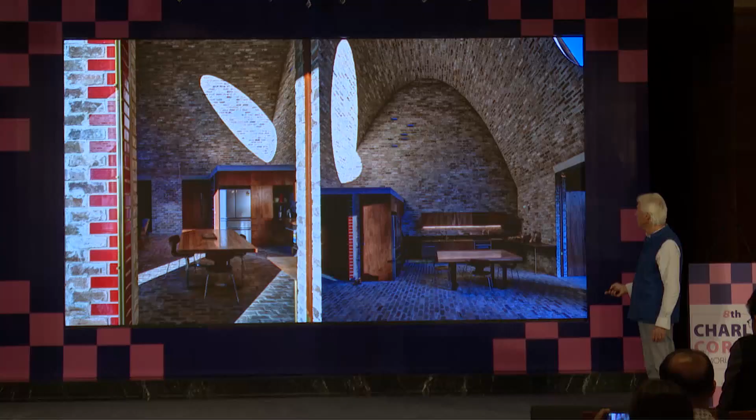One of the people in the office - her father is a potter - made all the basins for the house. We just had this single opening in the roof that opened to the night sky, and that cast amazing shadows and pools of sunlight around this room, constantly changing it. It also threw moonlight around the room as well.

I had a wonderful text message from the new owner just the other day about how this building has changed his life. Very simply done - that was Basil who commissioned the job. That's where the pond reflects on the ceiling into his work studio - it's the connection with the night sky. And that's the simplicity of the entry.

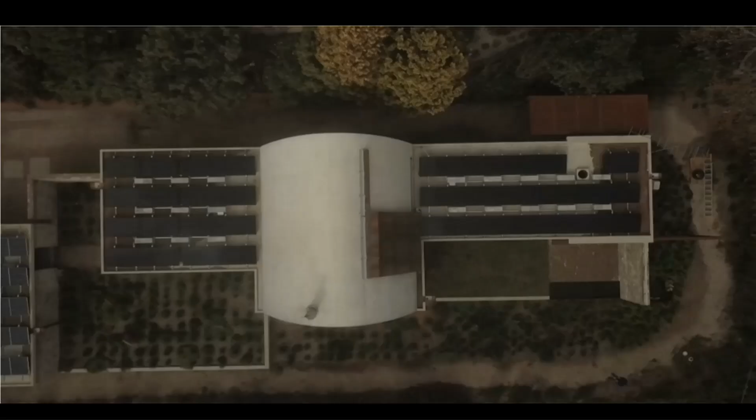Is there sound with this?